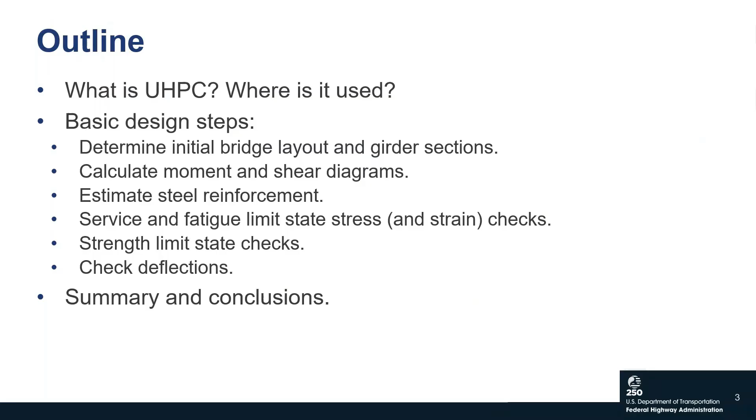So what is UHPC? UHPC is still concrete. It is made of similar ingredients that you'll see in conventional concrete, but the proportions and the gradations are different.

The image here represents the composition of conventional concrete and UHPC based on mass percentages. UHPC has a higher percentage of cementitious materials. It does not contain coarse aggregates, so you'll see only very fine aggregate or fillers in UHPC. It has a very low water-to-cement ratio, about 0.2 typically, and it contains short steel fibers.

The image on the right shows a microstructure view of conventional concrete compared to UHPC. You can see the coarse aggregate, typically about 1/4 inch to 3/4 inch in size. You won't see that in UHPC given that it does not have any coarse aggregates. What you'll see are those shiny dots in the UHPC picture - those are the steel fibers in the matrix. Typically, steel fibers are included at 2% by volume.

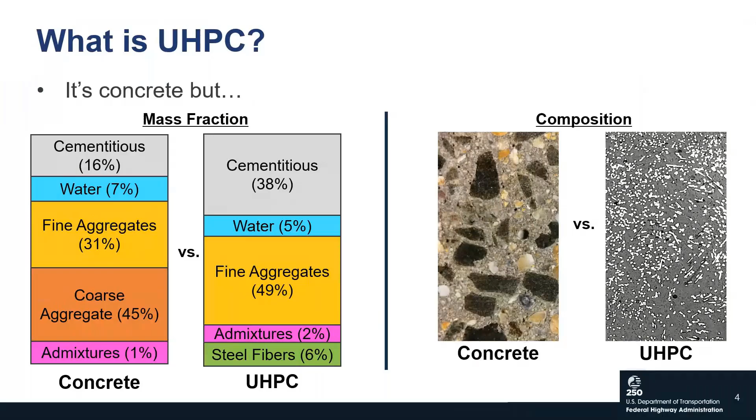In terms of mechanical property, UHPC is still concrete, but it has a very, very high compressive strength. The picture on the left shows a comparison between the compressive stress-strain curve of conventional concrete in dark gray compared to UHPC in red. UHPC is about twice as stiff as conventional concrete, 2 to 6 times stronger in compression, with the compressive strength ranging from a minimum of 17.5 up to 24 KSI with ambient cure. You can go higher with different curing treatments.

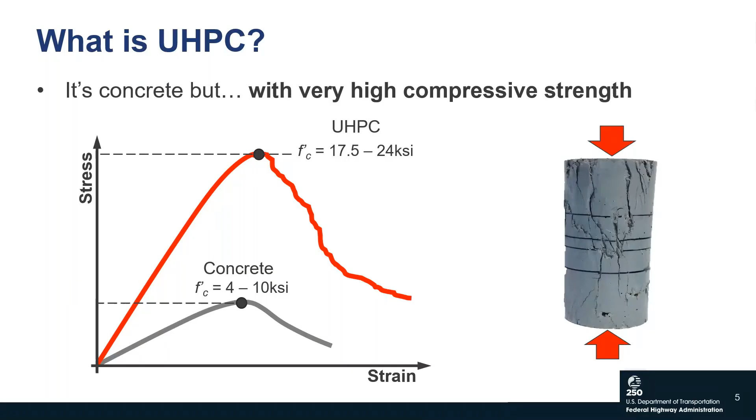More importantly, where UHPC stands out from conventional concrete is its ability to carry tension. Not only can it carry a high tensile strength, but it can also sustain that after cracking. If we take a stick of conventional concrete and apply tension, you'll see it carry some stress, maybe around 0.4 to 0.6 KSI typically. However, then it cracks, and once it cracks, it splits into pieces, and the load directly drops down to 0.

However, take a stick of UHPC and start pulling on it, and you'll get the stress-strain curve shown here. UHPC has fibers in it, and those fibers bridge that first crack, stopping it from growing and reinforcing it at that location. Then another crack will form, and the fibers there also reinforce it, stopping it from growing, then another forms. You enter what we call a multiple cracking phase, where multiple cracks are forming and being bridged.

Those cracks are very, very small - you can't really see them with the naked eye. So multiple cracks are forming and being bridged by those fibers, but the cracking stress within that multiple cracking region is maintained with increasing strain, or even exceeded. That behavior continues until the fiber bridging capacity is exhausted and the fibers can no longer hold these tight cracks together. One of these cracks starts to open up - what we call the localized crack - and the fibers there start to pull out. That phenomenon we call crack localization.

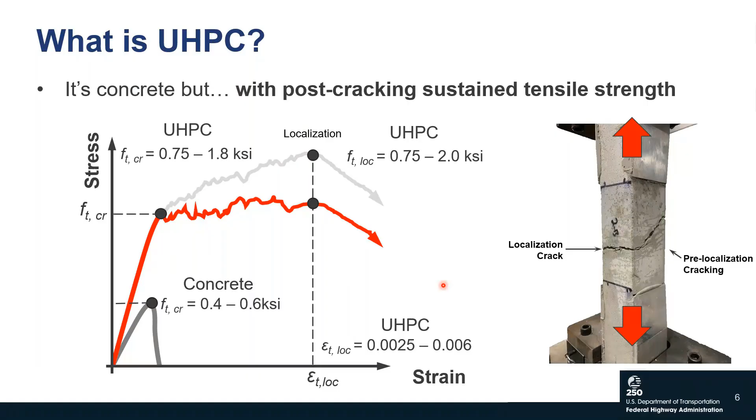The tensile stress, the effective cracking stress or first cracking stress of UHPC ranges between 0.75 KSI all the way up to 1.8. Crack localization starts at a minimum equal to the effective cracking strength, so about 0.75, and can go up to 2 KSI. The crack localization strain - that point beyond which you start losing tensile capacity - is about 0.0025 and can go up to 0.006.

But that's not all. Another very important property for UHPC is its high durability. UHPC has a very dense matrix that has a discontinuous pore network, which results in a nearly impermeable material. This prevents water ingress, which protects the integrity of the UHPC itself, but also protects the reinforcement from corrosion that's inside.

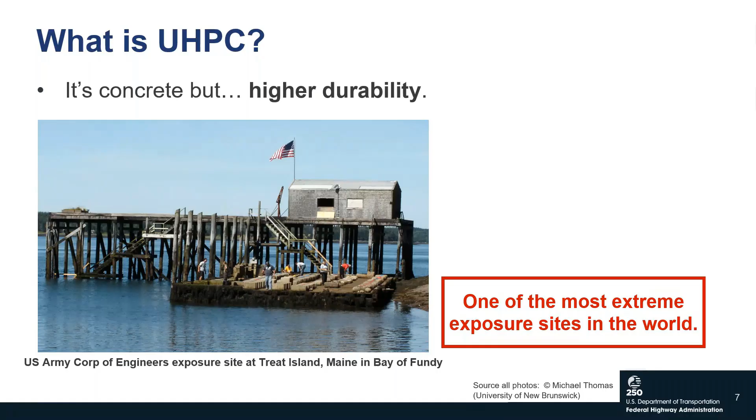To demonstrate this, what I'm showing here is a U.S. Army Corps of Engineers durability testing facility on Treat Island in Maine, in the Bay of Fundy. This island is known to have some of the world's largest tides and harshest environments for concrete, with 2 cycles of low and high tide per day, and potential freezing and unfreezing in cold temperatures. After 11 years of exposure, the UHPC samples had minimum deterioration. You'll see those brown spots - those are local corrosion of fibers that went away, but it's cosmetic.

Nothing goes into the section itself. I don't have a picture for similar conventional concrete samples because typically they would completely disintegrate within this time frame at that facility. There are many different applications that take advantage of these enhanced properties of UHPC.

Of note are the UHPC connections between prefabricated elements. Those could be new construction or repair of existing connections, repair of deteriorated ends of steel girders, UHPC overlays, and link slabs. There have been also several full-scale bridge component applications.

The applications were targeted early on, one, at testing how this technology performs in real life on a bridge under traffic, and also served as a proof of concept that we can make, design, and build bridges made fully of UHPC.

Many of those applications were in Iowa, and one more recently was built in Michigan. The first deployment was in 2005, so about 21 years ago, with no sign of deterioration or damage so far.

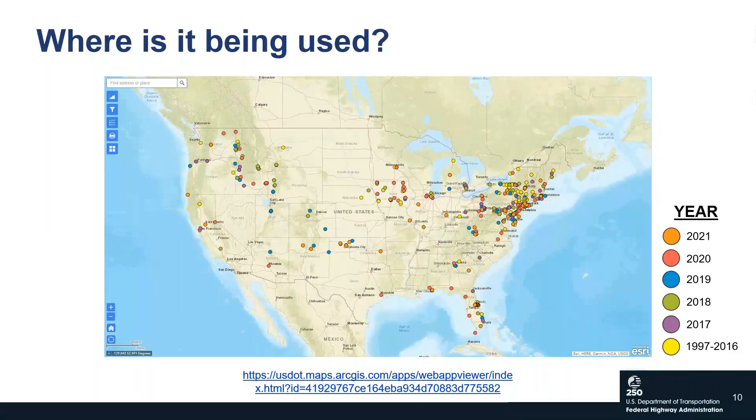The map you see here on the screen has many dots, hundreds and hundreds of these dots. Each dot represents the location of a bridge that has utilized UHPC and that's still open to traffic today. We filtered those dots based on the application.

So what you're seeing here is an evolution, also the total number of UHPC applications and bridges with respect to the years, throughout the years. As you see, many of these applications use UHPC in connections. The second most used application was preservation and repair and bridge overlays.

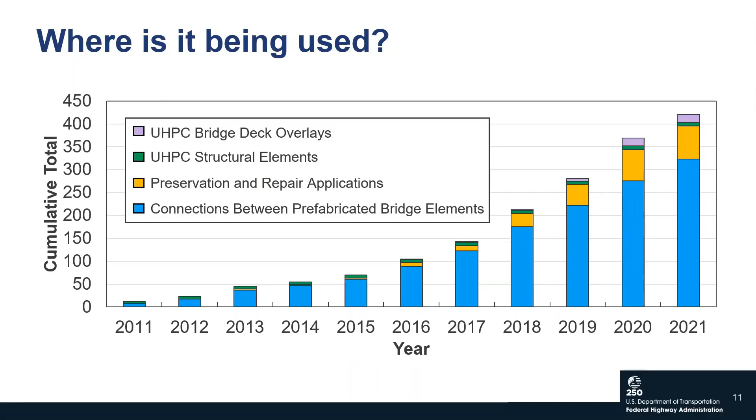While there are some structural applications of UHPC, the majority, as we said, is not, primarily because there was no structural design guide that allows engineers to utilize the enhanced properties in structural design and build those new components efficiently. But that has changed today, and we can make structures with UHPC.

It is now a possibility, and that changed with the publication of the AASHTO Guide Specification for Structural Design in 2024. The guide parallels Section 5 of the AASHTO LRFD Bridge Design Specification and only contains guidance that is different for UHPC than conventional concrete.

If it's designed the same way, if there is no change, the guide refers you back to the relevant section in the LRFD. In general, what you'll see in this presentation and in the guide is that the design process for UHPC follows the same basic engineering mechanics and mechanics of material concepts that you are familiar with and that you use in conventional concrete design.

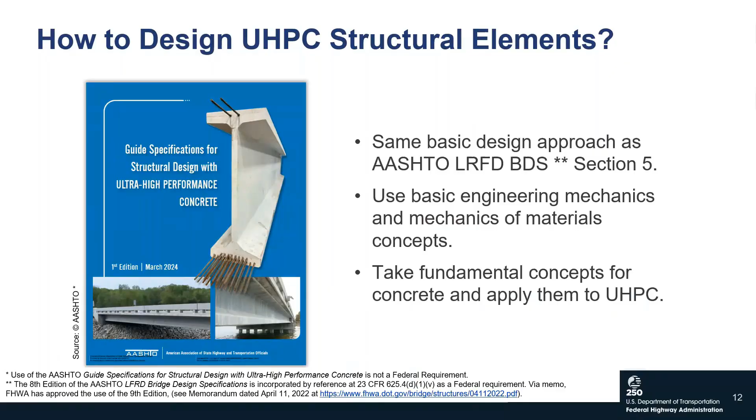However, it does incorporate the behavior of UHPC into the design process, and the changes come from that. Throughout this talk, you will see how to design UHPC structural elements. You design it just like concrete, but now you can utilize the tensile capacity in design. That's for the first time, because of the sustained post-cracking tensile capacity.

The way we do that is by utilizing a new mechanical model in tension that describes the behavior of UHPC in tension. Generally, that model mimics the stress-strain response that you obtain from a direct tension test. So it is an elastic-plastic model, and I want to point out that it does stop right at the point of crack localization.

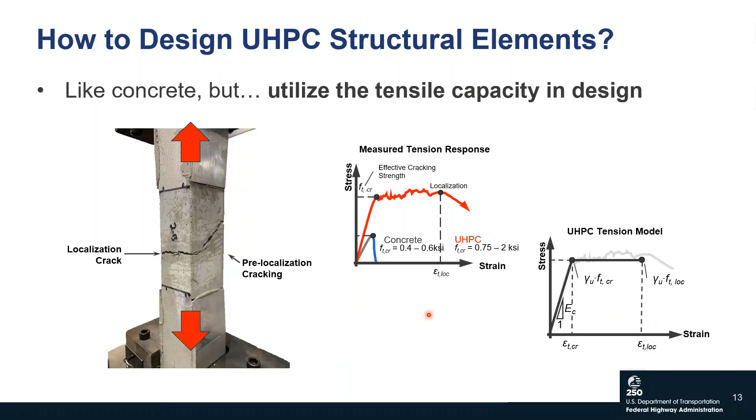That is the point beyond which you will start seeing a drop in tensile stress. So you start to lose that bridging capacity of the UHPC and the load starts to drop in tension. That is the point where the model would stop the behavior.

You design UHPC just like concrete, but now with the introduction of the tensile capacity in the design, a new failure mode will need to be checked, and that's related to the loss of the tensile capacity. That failure mode will be checked and designed for typically, and that is covered in the guide.

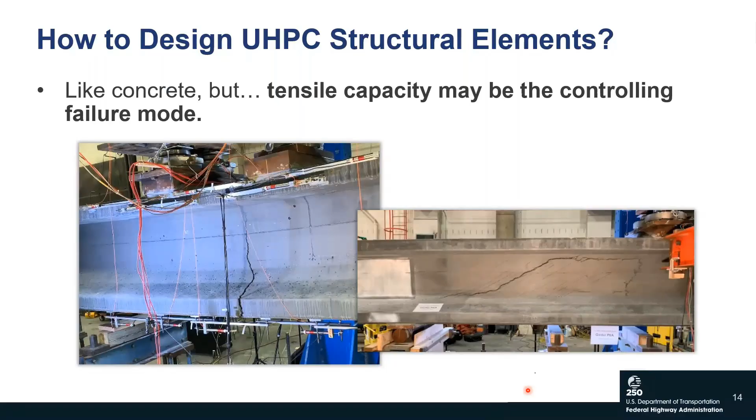The picture here on the screen shows a flexure test, a UHPC girder tested at Turner-Fairbank in flexure, and this one is in shear. As you can see, that is the crack that you'll see around the point of failure, which corresponds to the crack localization of the material at the point at which you start to lose that tensile bridging capacity.

New designs are possible with UHPC, again thanks to the tensile capacity given by the fibers. The UHPC gives you a reduction, allowing you to reduce the need for auxiliary reinforcement, such as those used for temperature and shrinkage.

UHPC also reduces congestion of reinforcement when reinforcement is needed. UHPC can carry a lot of shear force, so there is often no need to add transverse shear reinforcement unless it's structurally required, of course.

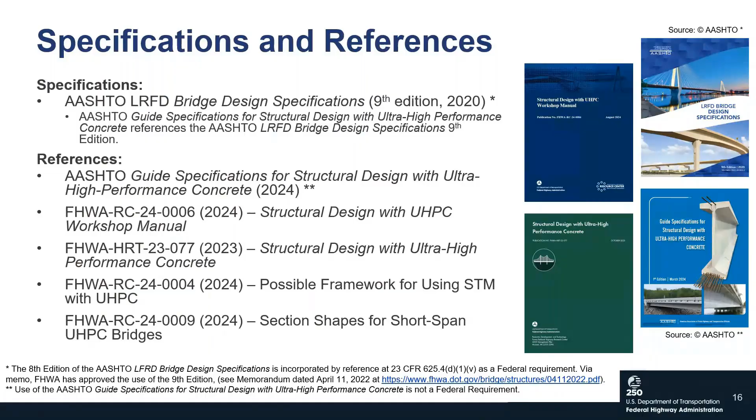Here are a number of specifications and references used in this presentation. The first is the AASHTO LRFD bridge design specification, for conventional concrete. Then there's the AASHTO guide specification for the design of UHPC. We're also presenting 4 other references published by Federal Highway that contain design examples to help you get started with the design of UHPC structural components. Now let's switch gears to talk about the design process.

Let's remember the design steps you follow for conventional concrete when designing a bridge. First, you determine the initial bridge layout, girder sections, size, shape. Then you calculate moment and shear diagrams, steel reinforcement—whether pre-stressed or non-pre-stressed—then the service, fatigue limit state, the strength limit state, and finally check deflections.

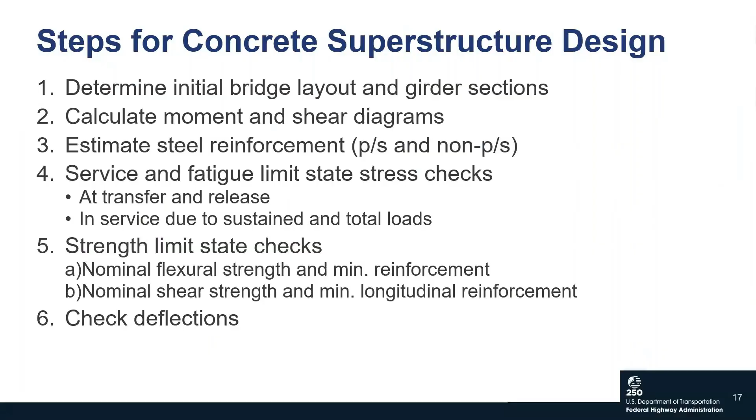The process to design UHPC structural elements is the same, with two main differences which I'll highlight here and we'll go into more detail on later with David. These are a strain check added for non-pre-stressed components at the service limit state, and also, at the service limit state, a principal tension stress check in the webs of girders, for both pre-stressed and non-pre-stressed girders.

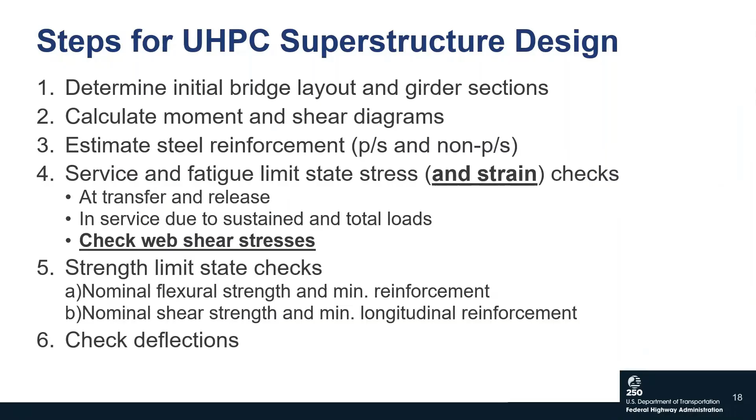The first general step in design is to determine the initial bridge layout. Same basic principles apply, no change here—you still need a minimum of 4 beams, or 4 girder lines or webs per span, for redundancy.

However, if you were to design the same bridge and compare what it would look like if made of UHPC—well, UHPC girders are stronger, so maybe you can reduce a few girder lines. For example, if you're doing a 5-lane bridge with 5 lines of girders, a UHPC bridge might only need 4, eliminating one in that example.

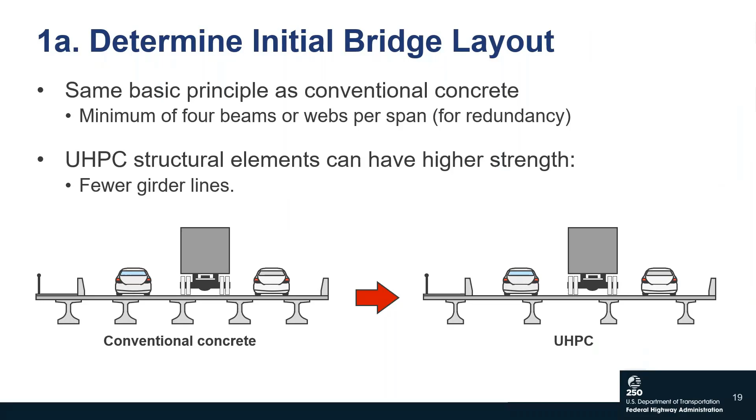The higher strength of UHPC members also allows them to span longer, so for the same depth you can extend the span. That means you could move from a 3-span bridge to a 2-span bridge, which allows more lanes of traffic underneath and decreases substructure cost because you're building one less pier.

You may also want to eliminate a support in water. In this case, you're not only reducing the cost of building a pier in water, but also avoiding problems that come with that, such as durability or scour concerns.

The higher strength of UHPC members also allows for shallower members—lighter, more optimized, leading to lighter superstructures and reduced demand on the substructure. Being shallower also allows for a lower profile, which sometimes reduces cost by decreasing the cost of building up approaches to the bridge.

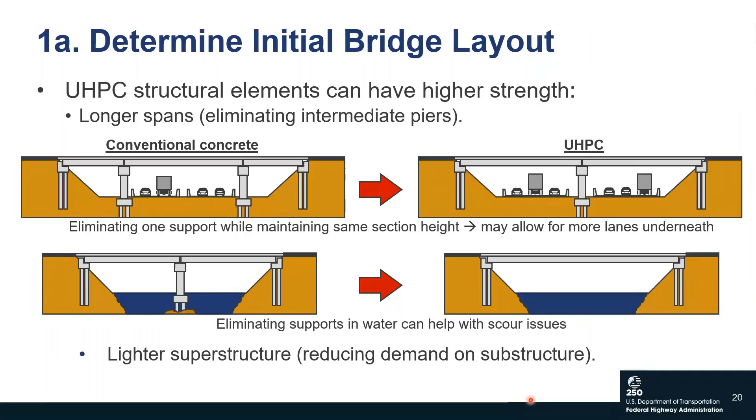All right, thank you, Rafiq. So I'll continue walking us through some of these design steps. The next step in the general design process is to select your girder shape. With UHPC, we can't just use the typical shapes we have for conventional concrete directly—we need to modify or optimize them, because UHPC allows us to have thinner webs, narrower top and bottom flanges, and shallower section depths overall.

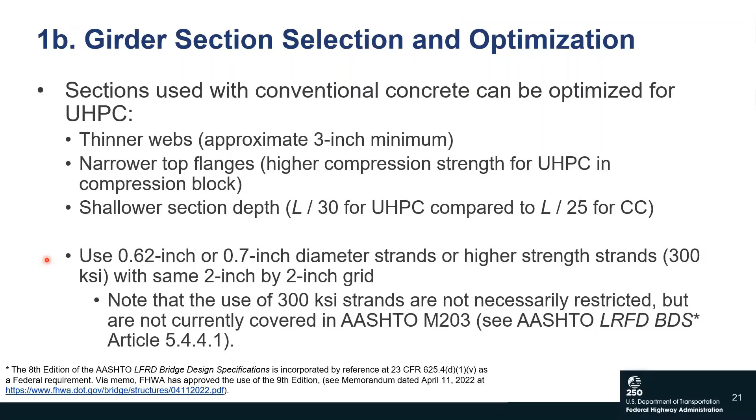With UHPC, we can also use larger diameter strands or higher strength strands, all on that same 2-inch by 2-inch grid that we use for conventional concrete.

As I said, there aren't any current standard UHPC beam sections. So as states and owners are looking for early deployment of UHPC sections, we need some kind of strategy for these pilot projects or small deployments. A good starting point is to start from our conventional concrete design standards.

What we can do is take what precasters have in their yards and modify them to take advantage of UHPC. FDOT has done this already with their H piles. In early efforts, they took their square pile sections, added some blockouts, and cast some early UHPC beam sections to be able to research.

They're using that as a starting point for their UHPC H-pile standard. Another example would be using bulb T forms that a precaster already has, looking to see if we can slide those forms in to decrease the web width. We can add blockouts in the top to further decrease the weight of the section, taking advantage of the higher compressive strength of UHPC. Maybe modify the bottom soffit if needed, and then cast the UHPC in that modified form.

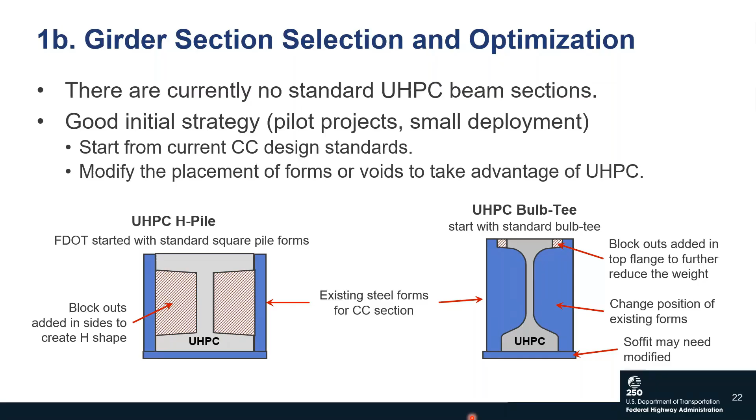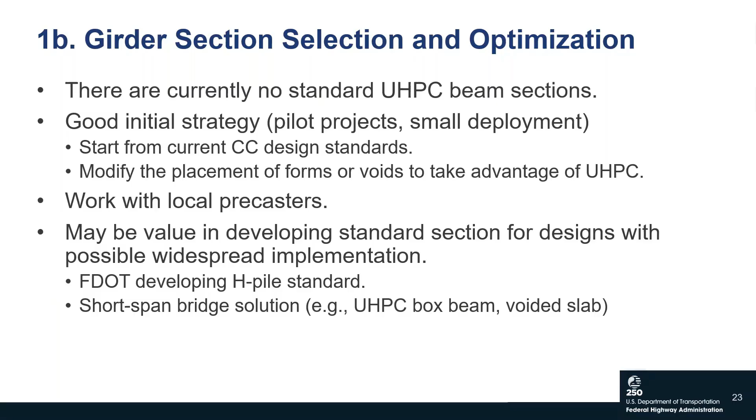So you could use any formwork you have at your local precasters and work with them to see how you can modify that formwork easily to optimize your UHPC sections. And if your agency is looking for more widespread implementation, it can be advantageous to take steps toward a standard section shape, like FDOT with their H piles. There are a lot of short span bridges, so we see short span bridge solutions as an early, more widespread implementation opportunity as well.

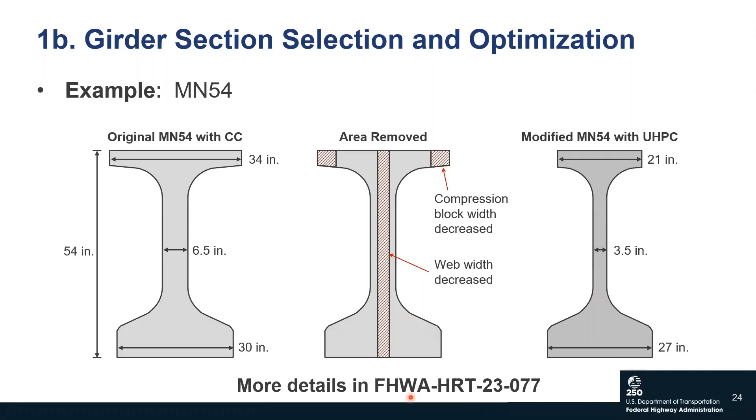A few examples. The first here is a modified Minnesota 54-inch bulb T section. More details are in this report, but you can take the side forms, slide them in to reduce the web width, add blockouts in the top to get this optimized section with a 3.5-inch web and 21-inch top flange. These modifications to the formwork reduce the weight of the section by 27%.

If we add a conventional concrete cast-in-place deck on each section, the conventional concrete beam on the left, UHPC here on the right, and for the UHPC section, if we use 7/10-inch diameter strands instead of the 6/10-inch for the conventional concrete, we can increase our span length from 128 feet for the conventional concrete section to 160 feet for our UHPC section. So we can increase our span length by about 25% while maintaining that 64-inch depth.

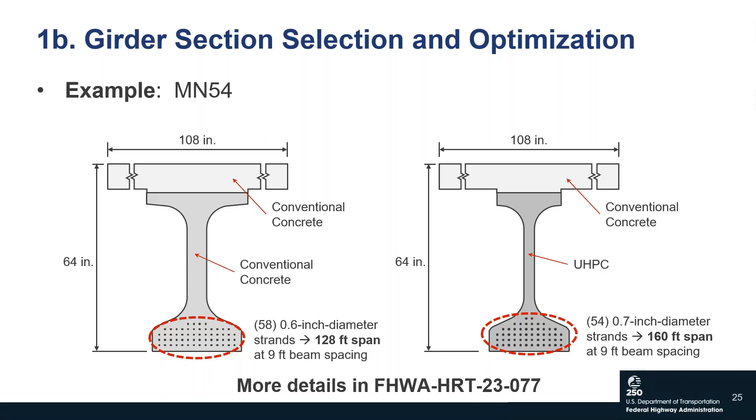On the left and right are equivalent designs. On the left, a 33-inch deep box in an adjacent box configuration with a composite 6-inch conventional concrete deck is equivalent in terms of design to a 33-inch deep UHPC box placed in that adjacent box configuration. Comparing these two, we're 6 inches shallower and 43% lighter using the UHPC section.

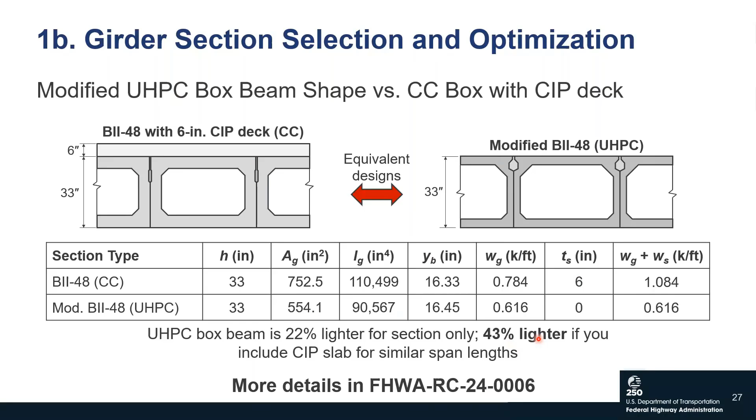We can also compare to adjacent boxes that are connected with transverse post tensioning and no cast-in-place concrete deck. We can still get equivalent designs with UHPC that are 6 inches shallower, and in this case, 27% lighter.

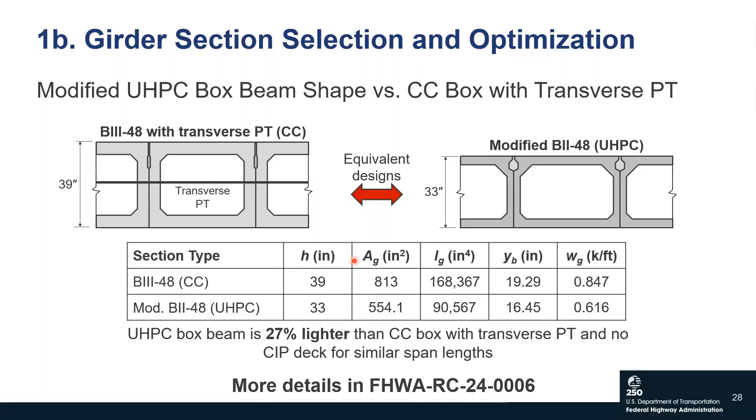We recently released a report to assist with section shape selection and design of short span bridges, as we see this as an early implementation opportunity. In this report, we have a few different section shapes, which I'll show on another slide, allowing for bridge design up to 125 or 140 feet, depending on your deflection limits. We also try to highlight a couple of case studies where we think UHPC can be used.

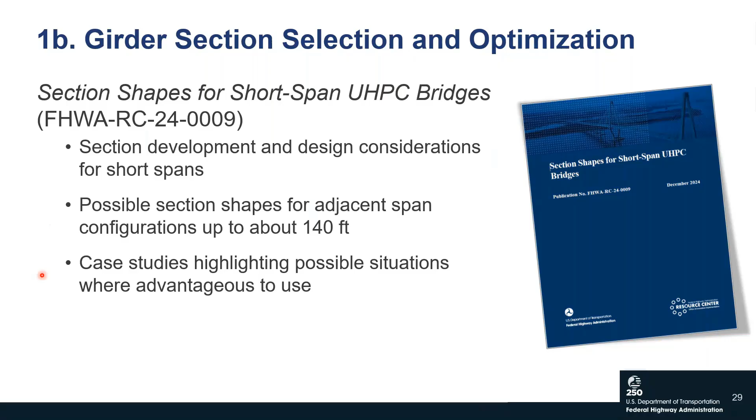Here's a summary of some of the possible section shapes included in the report. We tried to use examples of forms that a precaster may have: the modified box beam where we increase the central void, or a modified voided slab where we increase the diameter of these voids. We also looked at whether we could modify NEXT beam forms, since many precasters already have those, so how could we modify the section while still using those forms.

So maybe we can add some blockouts on the sides of the webs, or in the middle of the webs, or on one side of the web. You can see this shape here has a very similar shape to that pi girder, one of the early built UHPC structures.

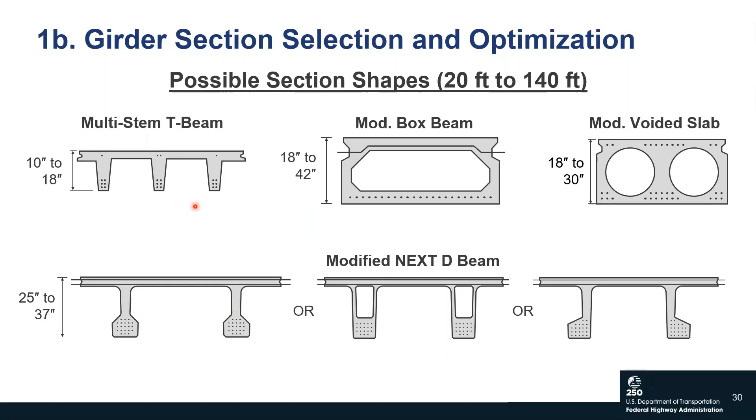Another multi-stem T-beam section here. This is similar to the Michigan triple T section that was built a year or two ago. We developed a couple different design aids for each of these sections in the short span bridge report, one being possible span lengths we can achieve for each of these section shapes.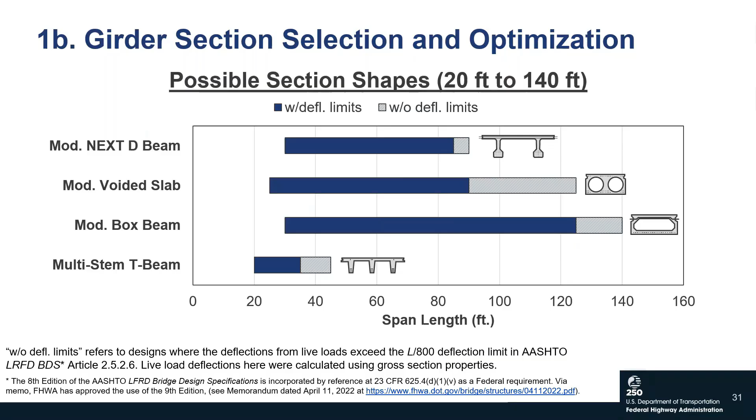You can see here some of the possible span ranges with some of these sections. In the report, we also highlighted a couple case studies where we think UHPC would offer some advantages over conventional concrete. So one here, if your goal is to reduce your superstructure weight, maybe you want to reuse your substructure and you can't with conventional construction, you may consider using UHPC.

Also in the same example, maybe you have a low overhead clearance for the roadway underneath. So if you wanted to increase that, you can get a shallower bridge profile using UHPC.

So again, if we're looking at a 120-foot span, the left and right would be comparable designs. With conventional concrete, you'd need about a 42-inch box with a 6-inch cast-in-place concrete deck. With UHPC in an adjacent beam configuration, you need a 42-inch depth superstructure or beam depth.

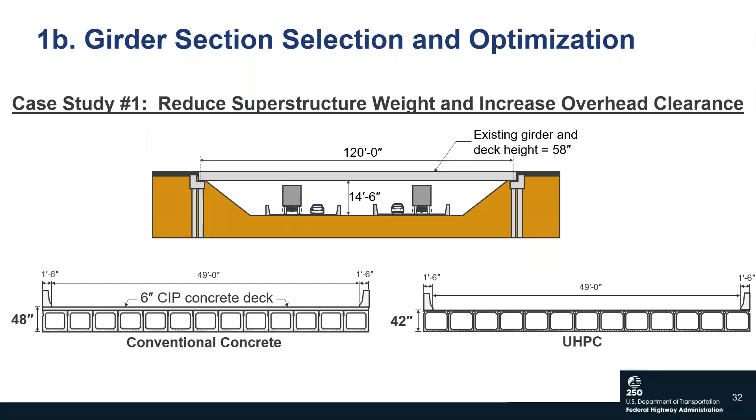As a comparison, we can compare the overall superstructure depth and the weight here. We can see we're 6 inches shallower with UHPC, and much more significantly, we have a superstructure that's 41% lighter using UHPC compared to conventional concrete.

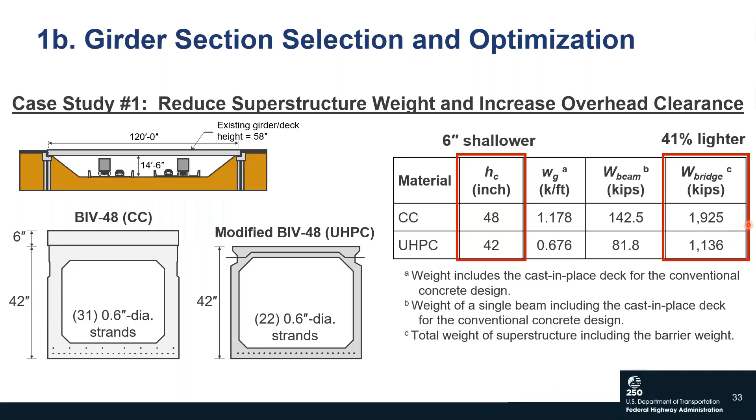There are a few other case studies that we'll highlight in that short span bridge report. The first, Rafik mentioned it, about potentially increasing your span length so that you can eliminate a pier in the water. Maybe you have some scour concerns, or you just want to eliminate any substructure elements in your water. You could potentially span it with UHPC without increasing the level of the approaches.

Also, potentially going from a 4-span to a 2-span bridge configuration, eliminating some of those shoulder piers and adding some lanes underneath could be another opportunity for using UHPC. We also highlight weight savings of different short span slab beam alternatives with UHPC compared to conventional concrete design alternatives, and a case study highlighting how you can increase your hydraulic clearance as well.

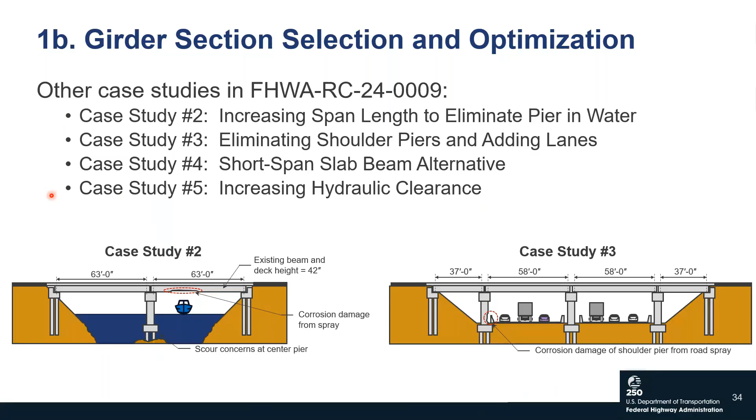Another decision that needs to be considered during the preliminary design steps is what properties you're going to use in design. So there are minimum values, or values that you calculate using the AASHTO UHPC guide spec, and then there are also typical ranges of available UHPCs that are in the market.

As a designer, you can choose to use the minimum properties, and these values would be specified in the UHPC spec, or a designer could survey the available UHPCs that may be used in a project, maybe talking to local precasters, getting their qualified mix properties, and then use the minimum ranges of those in design.

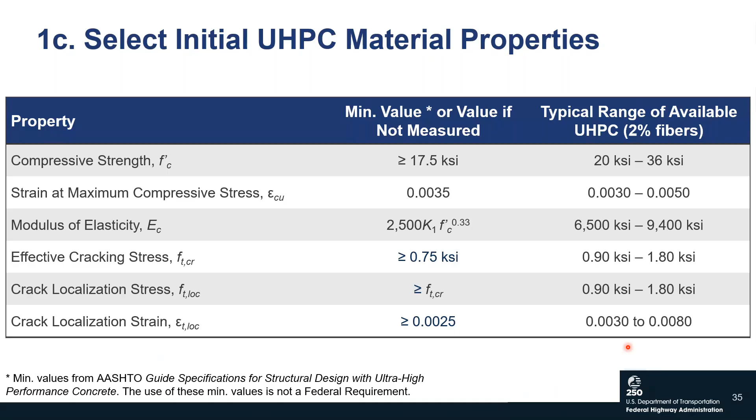There can be advantages to using the minimum of the available design values instead of the minimum values overall. As an example, as I talked about, deflections can be one of our limiting criteria. If you measure and know your local materials are a little stiffer, that can allow you to have longer spans while still meeting the live load deflection criteria.

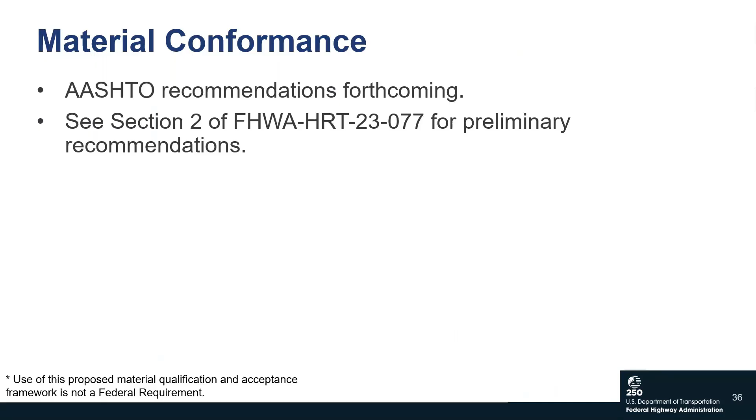Material conformance is another important topic related to the selection of UHPC materials. And when we're talking about material conformance, it's a little different than conventional concrete. With UHPCs, there are two stages in the material conformance process. There's a material qualification process where UHPC materials need to undergo a set number of tests, or a certain type of tests and a certain number of tests, to qualify as a UHPC material.

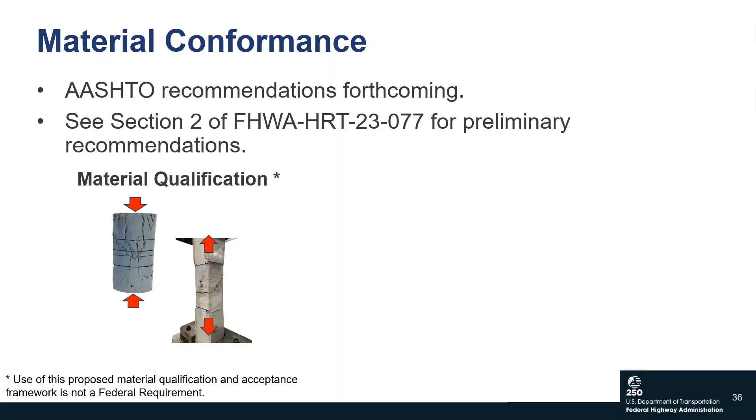And then there are material acceptance tests. These material acceptance tests are designed to make sure that the UHPC used on a project to cast members has the material properties that you assumed in the design process.

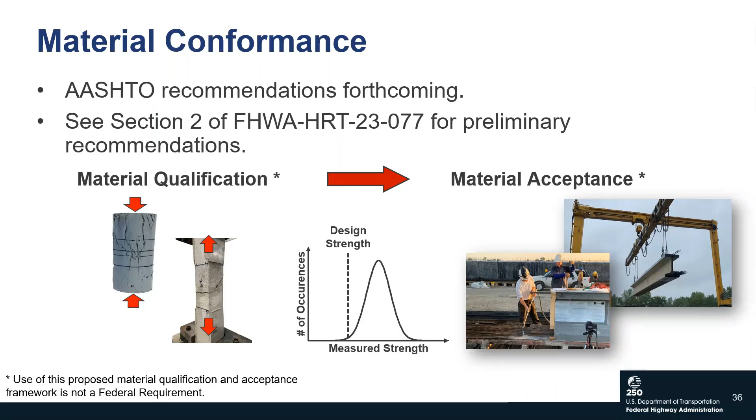FHWA worked with AASHTO to develop material conformance guidance. This has gone through the balloting process and passed COBS in June, and will be forthcoming in the next release of the UHPC guide spec. All of this material conformance guidance was based on an extensive experimental testing program, aimed at creating a statistical level of confidence in the qualification and acceptance stages.

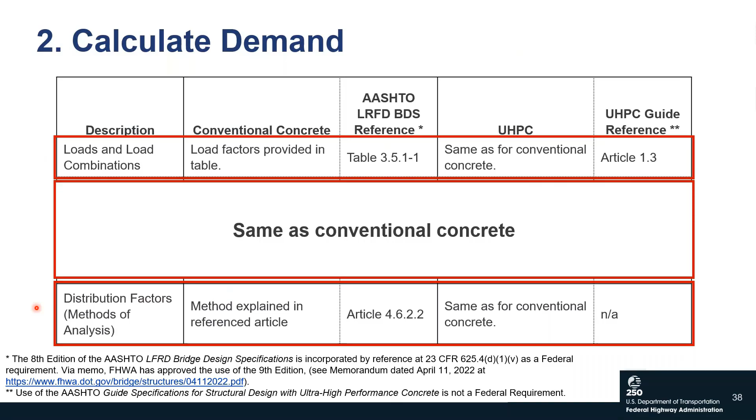The next step in the design process is to calculate the demands on the structure. In terms of our loads and load combinations, these are the same as conventional concrete, so we'll use the same procedures as conventional concrete design for UHPC members. Similarly, the distribution factors we use for conventional concrete can also be used when designing UHPC elements.

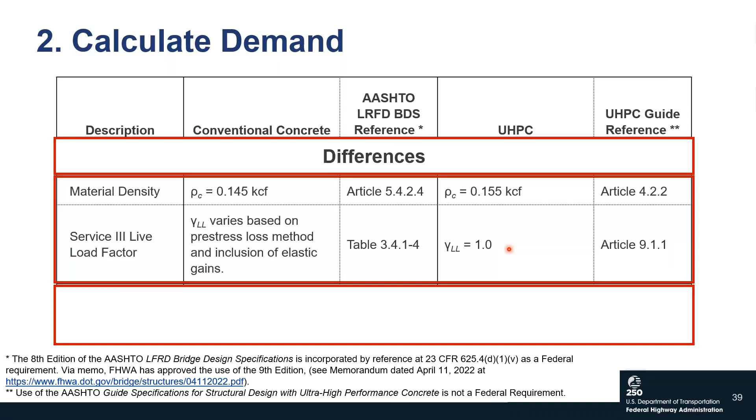The differences between the two design procedures are highlighted here. With UHPC, it's a denser material, so we need to use a higher density in our design. Additionally, we use a refined analysis procedure for calculating our losses, and because of that, our live load factor is equal to 1 instead of having the option of 0.8 or 1.0. In the workshop manual, we have many tables like the one shown here to help compare and contrast the design of conventional concrete members with UHPC structural components.

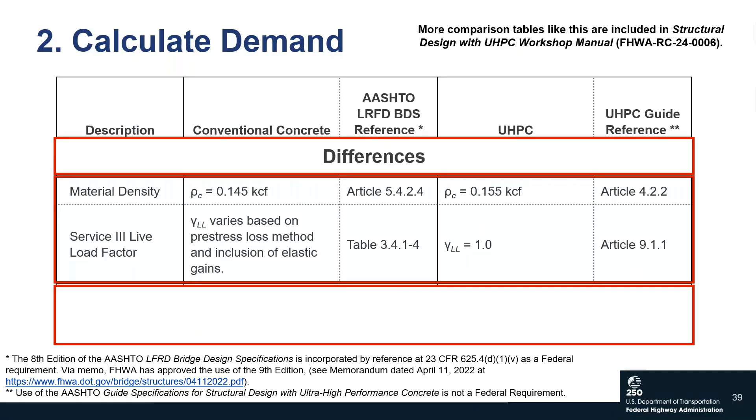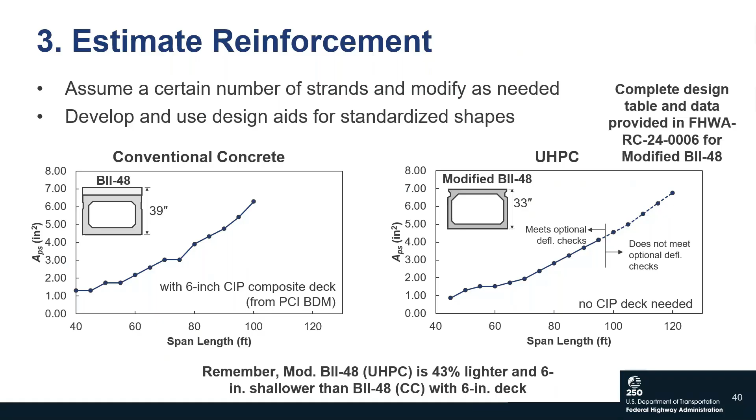Again, the UHPC section is 6 inches shallower and 43% lighter than the conventional concrete section. Because it's shallower, deflections become a controlling criteria after a certain point. The complete design table for this example is in the workshop manual. We also developed similar design aids and tables for other section shapes, depths, and span lengths in the short span UHPC bridge report, which you can search for using the report number.

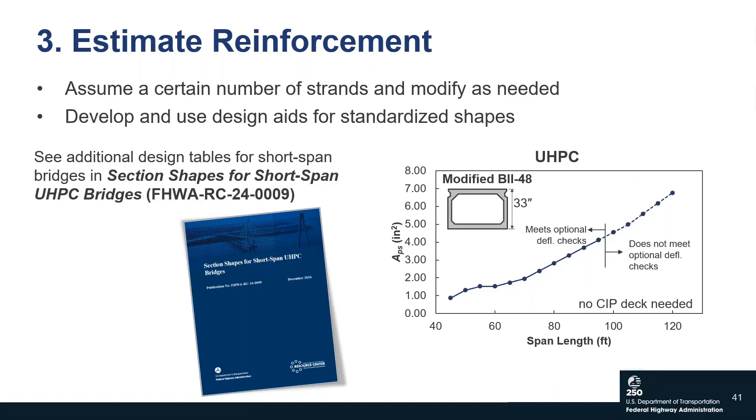The next step in the design process is to check your service limit state stresses. Essentially, it's the same procedure: you still need to choose gross or transformed section properties, calculate your pre-stress losses, and calculate stresses using elastic beam theory. The difference is you compare these against different stress limits.

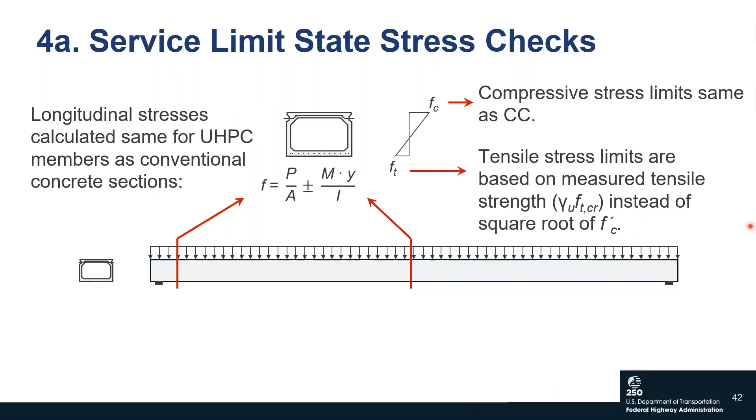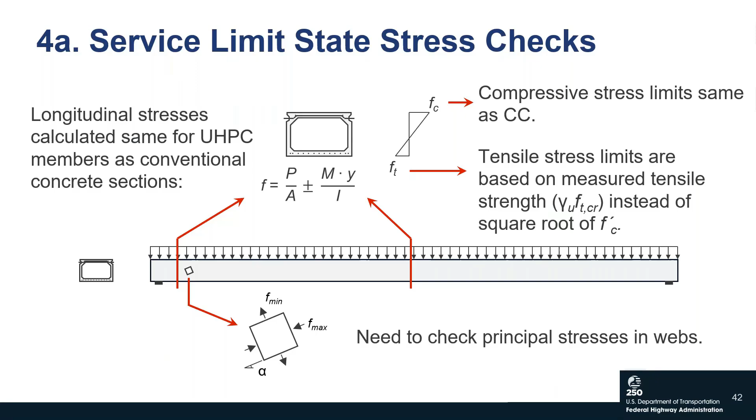The other slight difference is that with UHPC we have narrower webs and less shear reinforcement, so we need to make sure our beams don't crack under service loads. Because of that, we need to check the principal stresses in our webs, using the principal stress checks typically only used for post-tensioned members.

As I said before, one of the differences with UHPC at the service limit state is that we need to check these web shear stresses. The reason is that our UHPC members are likely to have little or no shear reinforcement, which is one of the big benefits of using UHPC — we can reduce or even completely eliminate the shear reinforcement in our beams. Also, our UHPC elements are likely to have thin webs, and because of that we don't want them to crack at the service limit state. This check helps to ensure that.

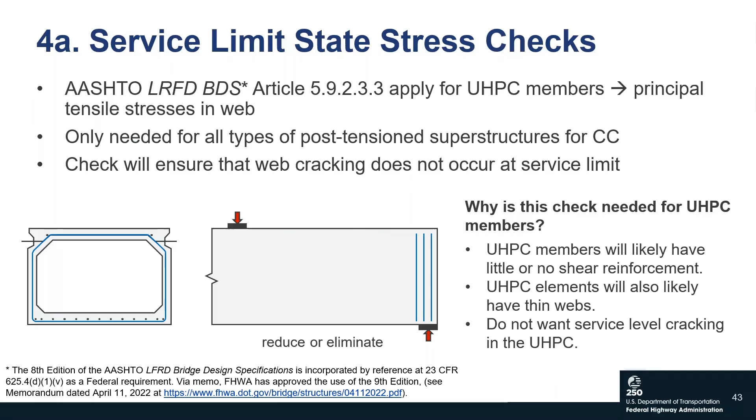Next, we would check our fatigue limit state stress checks. Just like conventional concrete, we need to check fatigue for UHPC in compression and for the embedded reinforcement in tension. We also need to check the UHPC in tension to make sure that it doesn't crack.

We're counting on the tensile strength of the UHPC in our strength limit states, and we want to make sure that it keeps those tensile properties after millions of cycles. So this limit helps to ensure that conservatively.

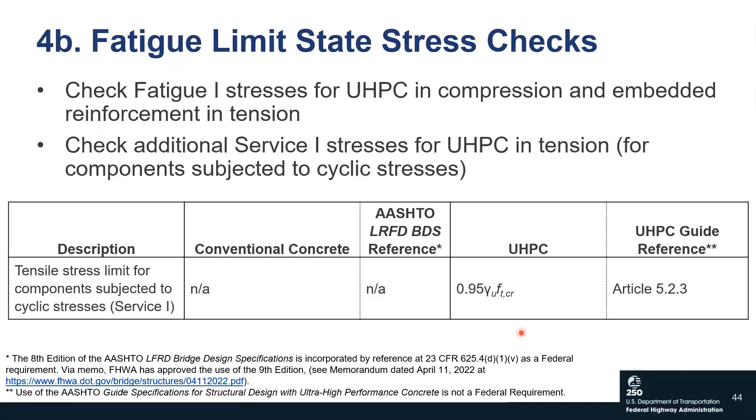Next, we have our strength limit state checks. We'll have both our flexural strength and shear and torsional strength limit state checks, just like with conventional concrete. In terms of flexure, one of the differences with UHPC is with conventional concrete, we have the option to use what's called the strain compatibility approach. With UHPC, we need to use the strain compatibility approach.

This approach, we start with an assumed strain profile. We use our stress-strain relationships for our different materials to go from strain to stress in our UHPC, steel, and pre-stressing. We take our stresses times our areas to get our force components, and then use equilibrium to adjust our neutral axis depth, and then ultimately calculate our moment and curvature associated with this.

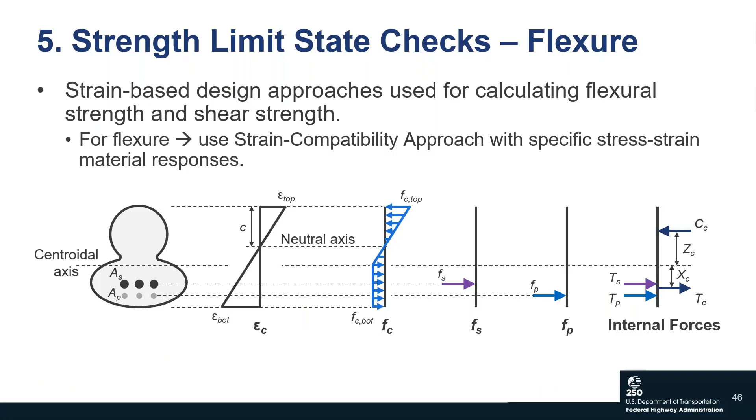Using strain compatibility allows us to take advantage of the tensile properties of the UHPC, and it also allows us to capture different failure mechanisms that may occur in the member. With UHPC flexural members, they're generally going to fail because we exceed the tensile capacity of the UHPC, so we can capture that using strain compatibility. But we can also capture if concrete crushing controls or if rupture of our reinforcement controls. So strain compatibility is a really versatile analysis approach.

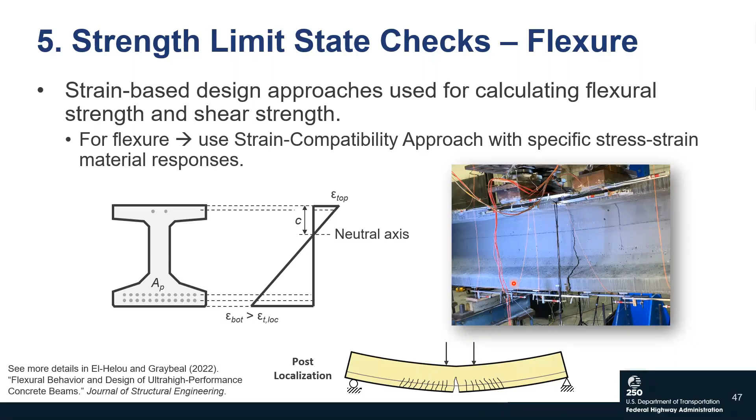In terms of shear, we're going to again use a strain-based design approach, and we'll use a modified compression field theory-based approach, just like conventional concrete. One of the main differences is the resistance mechanism. With conventional concrete, you have your shear crack, you have sliding along that shear crack, and that interface shear is what's going to resist your shear. With UHPC, the fibers keep your crack tight, and UHPC itself has a high tensile strength, so that's going to be our primary resistance mechanism.

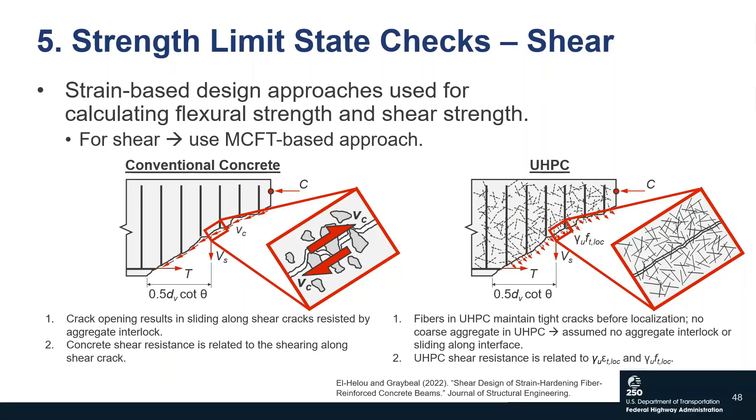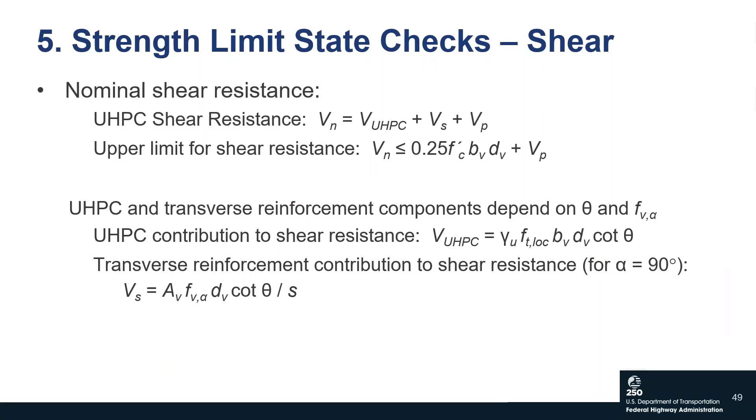Rafic and Ben went through the derivations starting with MCFT and leading to some simplified design equations that we can use to calculate our shear resistance, shown here. So there are equations and simplified tables that you can use as well for calculating your shear resistance.

The next step in the process would be to do your deflection checks. We need to calculate camber and our long-term deflections. We can do that the same as conventional concrete. And then we can also calculate our live load deflections, which would be the same as conventional concrete.

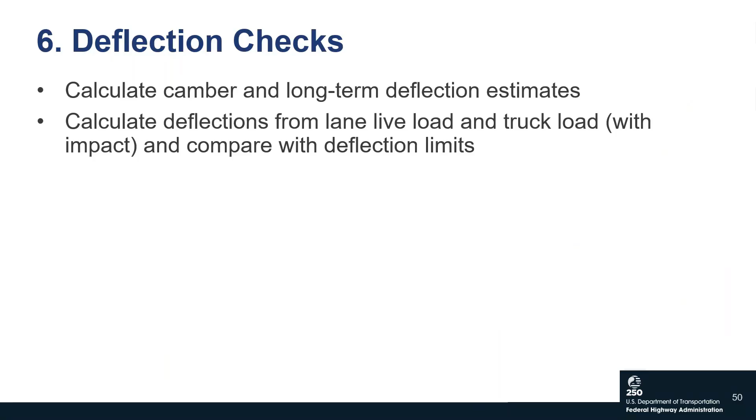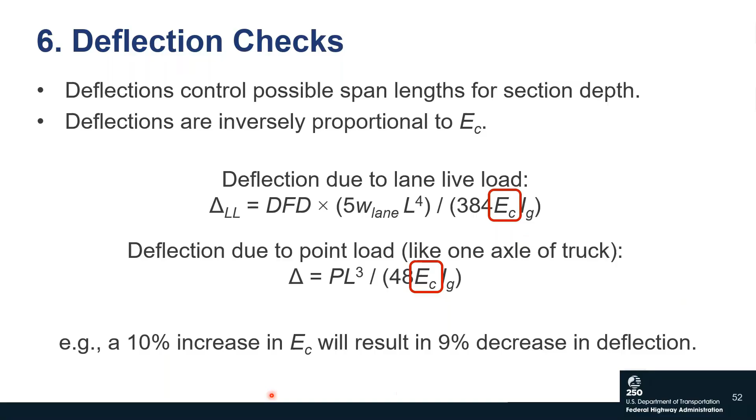As I've mentioned a couple times, UHPC members will or can have shallower profiles, so deflection limits can control. And so this makes the modulus of elasticity more important. We can see that deflections are inversely proportional to our EC. So if we increase our EC by 10%, then we'll decrease our deflections by about 9%.

So what this means is that if we have a baseline stiffness with a K1 of 1, we may have a max span of 95 feet. If we increase that stiffness by 10%, we can get a max span of 100 feet. If we go up 20%, we can get another 5 feet out of it, so 105 feet. So again, something else to consider.

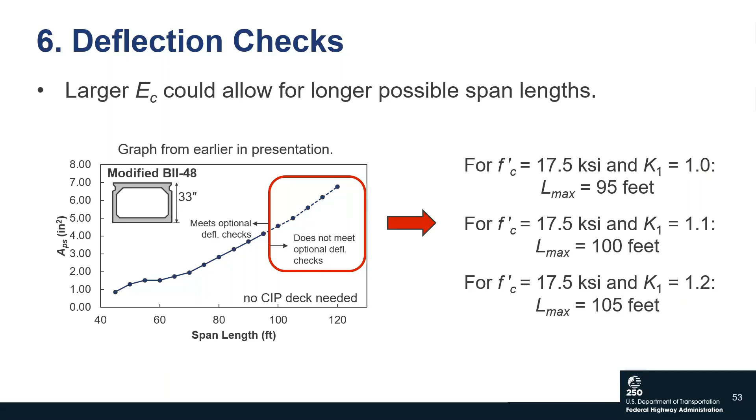You may want to measure the UHPC or use the modulus that's measured in the qualification process. Or, again, these were all developed using gross section properties, so using transformed section properties, or allowing the use of transformed section properties, can also allow for longer spans.

To wrap up the presentation, we can remember that there are many similarities in the design process between conventional concrete and UHPC members. So if you can design a conventional concrete beam, you can design a UHPC beam. And there are many similarities between the guide spec for UHPC and the LRFD bridge design spec, so if you can use the bridge design spec, you can use the guide spec as well.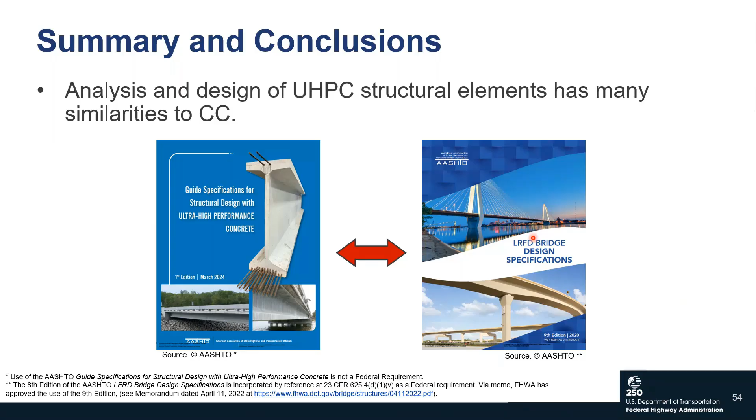And we can also remember many of the advantages of UHPC primary structural components. They have higher strengths, which allow us to have longer spans, maybe eliminate intermediate supports. We can have shallower sections to increase overhead clearance and lighter superstructures overall to reduce the demand on the substructure. We can also have improved durability, which can result in much longer service life for elements commonly susceptible to corrosion, and also structures with high importance.

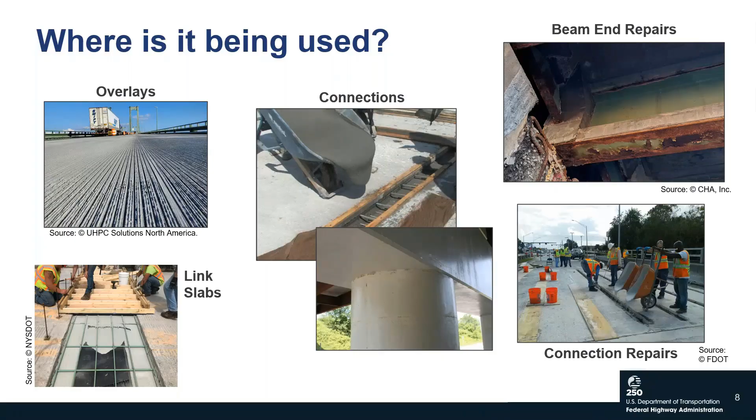Regarding fiber content by weight, the old connection information had a 2% lower bound. Is this still required? I think that maybe this referred to the ABC guide spec published in 2018. In that guide spec, the material section doesn't have any tension property requirements or criteria, so I guess it was developed on certain mixes and had a 2% fiber criteria. The updated UHPC guide spec doesn't have any minimum fiber content criteria, but it does have the tension property criteria. So if you're doing connection designs, I think it's still okay to use the criteria in the guide spec. If you wanted to also test your tension properties and use the UHPC guide spec, you could do that as well.

A question came in: How flexible are steel fibers? 30 years ago, Florida DOT used UHPC, and we heard from contractors that finishing concrete was difficult due to steel fibers. What has changed in that regard?

They're steel fibers, so they're still high strength steel, and they're short. I'm not quite familiar with the original mix, but the mix design has come a long way, so the composition is a little bit better now. UHPC started about 30 years ago, it was called reactive powder concrete before, and over time there was refinement in the mix composition. You still get at the surface sometimes what they call elephant skin, or a bad surface, because it's self-consolidating and air bubbles go all the way to the top. So you can tap the surface or screed it, that's how they usually do it these days. But in terms of mixing, with the short steel fibers inside, they've figured out how to mix it and make it a consistent, uniform material.

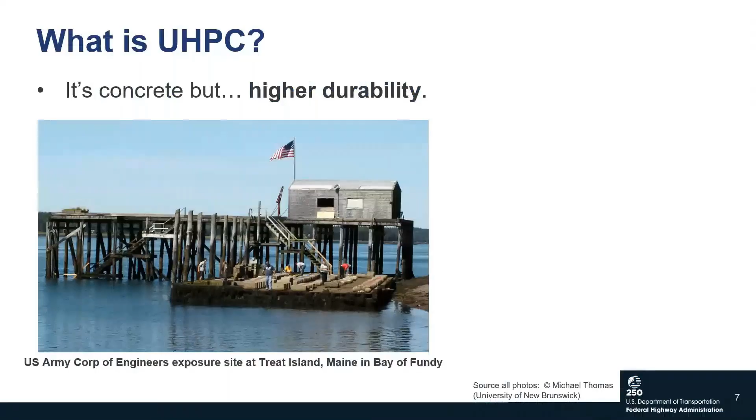When there is corrosion, how does the UHPC with steel fibers perform? There was a picture showing it held together, you could just see a little rusty spots on the top, but it was pretty good. The corrosion, if there is a fiber at the surface, it will corrode and go away, and you will have that stain, a brown stain of the fibers. The fiber's not there anymore, but that's the extent of the discoloration or protrusion into the specimen. So it's just surface, mainly a cosmetic thing, nothing that lets water go inside.

What is the cost difference between a UHPC deck overlay and a latex modified concrete overlay? I'm not sure, it may be more expensive, but it may last a lot longer. There's a nice cost comparison that was done for the Delaware Memorial Bridge, so you could search for that. That was again a report by Dr. Haber, and the Delaware Memorial Bridge ended up using a UHPC overlay compared to a couple different alternatives because they determined it was the least expensive of the options.

Another question: Have stability analyses during transportation and handling been performed for the optimized PSC beam section shown with increased span lengths? They haven't been, but the methodology that PCI has put out recently could still be applied for the UHPC sections as well, just modifying the section properties for your optimized UHPC section.

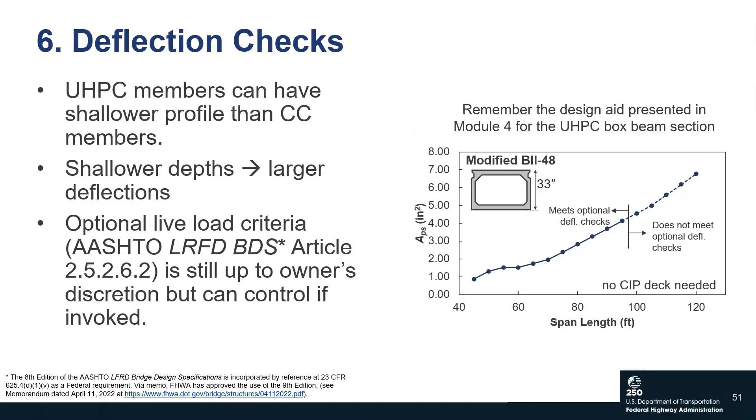Or you can use transformed section properties to get those live load deflection limits to check. Has the FHWA or any other official publication released a report on the ultra girder design concept for a 300-foot single span referenced on slide 15? For the 300-foot girder, Ben and I published a journal paper maybe 8 years ago, right before the guide.

What you will see is a design from FHWA with a conventional concrete deck, like an I-shaped girder based on the Minnesota MN54 or MN64, spanning 160 feet. The 300-foot design you'll only see as a summary in a conference paper. The ones shown here in the picture are the first two on the left. The smallest one is 32 inches deep, and the next is 43 inches deep. Those were tested at Turner Fairbank.

They're tested in flexure and shear, and those results are published. The deeper one, the 73 inch, we still have in the lab. We're planning on testing it within 6 months to a year.

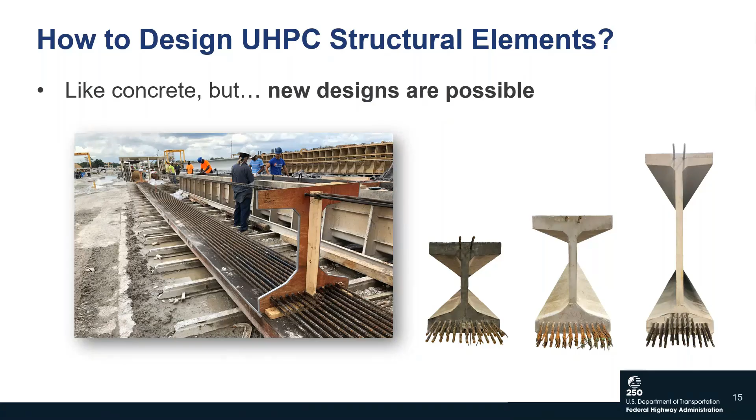Have any of these seen actual deployment? Those specific shapes, no. But there have been other I-shapes deployed in Iowa, varying between 30 to 40 inches deep. The first deployment was an I girder, the second was an I girder, then you'll see the pi girders, and the last one was a triple T, the one in Michigan.

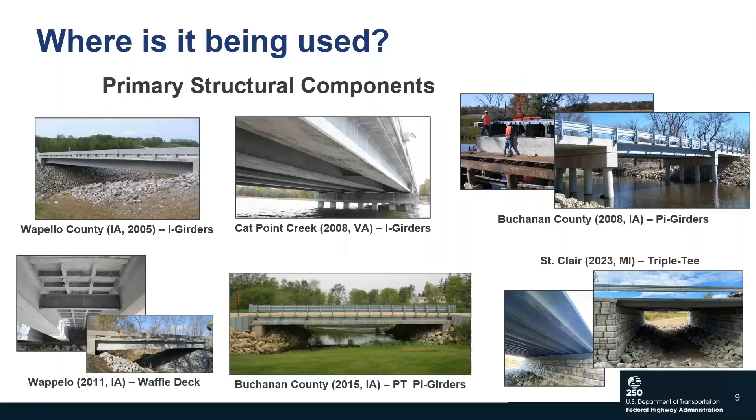The question came in about how UHPC performs when exposed to de-icing salts on highways. You showed pictures of the ones up in Maine that were immersed in salt water, but how does that compare to de-icing salts on the highway?

It's a liquid, so it won't go inside - that's why it's been used as an overlay, for example, on the Delaware Memorial Bridge. The chloride won't penetrate more than usually what the tests have shown, like 5 millimeters max, and then it stops. So it's pretty small, and you should be protected. That's one of the main reasons UHPC has been used in overlays.

Now this is going to regard box beams. Is an overlay required with UHPC box beams, and how do you achieve acceptable cross slopes and riding surface?

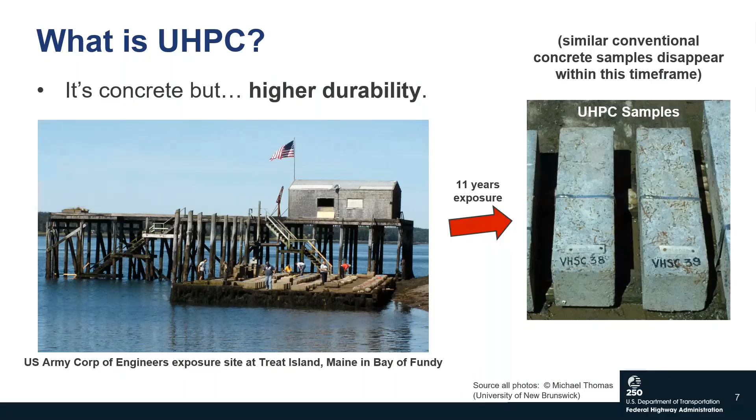I'd say an overlay is not required. In terms of construction challenges with adjacent beam configurations, you'd have the same challenges as with conventional concrete. A lot of the time when using UHPC as your riding surface, you're going to grind off the top quarter inch or so. This would be planned into the casting of the beams and the joints, helping you achieve the desired profile within your required tolerances.

Sometimes they groove the decks, or when grinding it, does that affect the steel fibers at all? The largest deployment for an overlay application where they had to grind and groove the surface was the Delaware Memorial Bridge project. We've published some different things on that project.

We've heard they've been able to use the same equipment, though they had to use a certain grinder head. Some would wear out quicker than others, but there are ones that are easily available - just like some aggregates are harder than others. There's also guidance we provide on priming the line before pumping the fibers through it so you don't get any clumping.

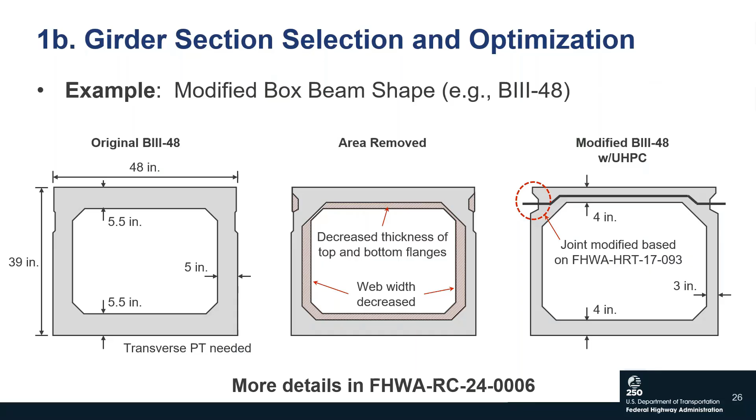Do you know of any use of UHPC for railroad bridges using AREMA code and loading? I know AREMA is looking into UHPC, they've come to our lab a couple of times, and they're looking into incorporating UHPC into their codes. In terms of structural design, this guide still applies, the concept's still the same, you need to find out different loads. But I know they're looking into it.